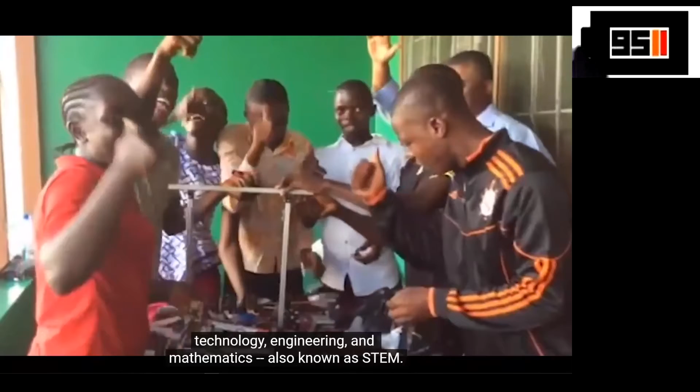Our mission is to inspire leadership and innovation in youth from all nations by empowering them through education in science, technology, engineering, and mathematics, also known as STEM. With First Global, any student can bring their imagination to the table and receive the tools to make their vision a reality. We accomplish this by hosting the First Global Challenge, an annual Olympic-style international robotics competition.

One team of youth from each country builds and programs a robot to compete in a game themed around an issue of global importance. But more than scoring points, these athletes score invaluable life skills by cooperating on alliances, surpassing cultural, geographic, and linguistic barriers to achieve their goals.

We're bringing the same passion and energy of sports to the field, but using it to inspire generations of high school-age students all over the globe to think creatively, problem-solve collaboratively, and lead collectively. In doing so, we're creating the changemakers who will work together to solve the challenges of an ever-evolving world in need of solutions. And is there a greater future than one created by ingenious young minds united for a better tomorrow?

Hello and good evening. My name is Tim Dodds, and it is my undeniable honor to welcome you to DAR Constitution Hall for the inaugural and 2017 First Global Challenge. 157 teams in 6 continents in total, but all coming together and convening as one. In the course of the next 3 days, these students, scientists, leaders, learners, dreamers, and believers abound will come together and cooperate on this grandest of international stages in robotics.

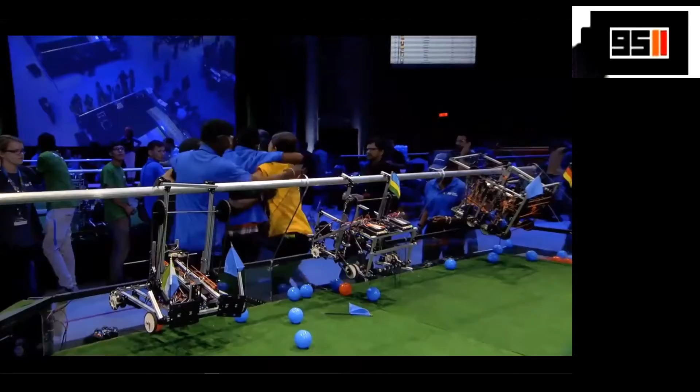It's very interesting to see how these teams interact with one another. These three were able to galvanize and gear up for the long road ahead in terms of competition.

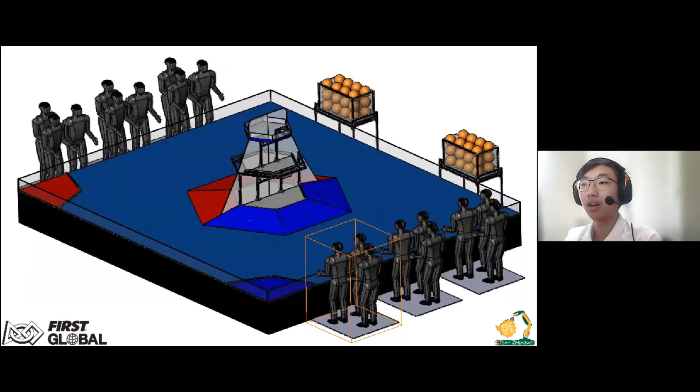This is an image of the game. First Global Challenge usually has a robot game, like an FTC game with specific rules tied to the theme. In 2019, they had to move these balls around to simulate cleaning pollution off the ocean. In 2020, the theme was connecting communities, the very first virtual global challenge. And 2021, this year, the theme was Discover and Recover. That's what we're presenting today, the efforts of Team USA and Team Zimbabwe in this challenge.

As I mentioned, the 2021 challenge has 3 parts. The first is a solution challenge, where you pick one of 4 categories: education, environment, health, and economy. Across 3 phases, you focus on one area and build a solution to a problem in your local area. Both us and Team Zimbabwe chose the environment, and we'll talk more about our solutions and how we ended up working together later. That's a brief intro, and we'll go into more detail.

Byron. So, Trish joined back. Trish, do you want to give a few words? Byron just walked through Malvern's slides. Do you have anything to add, Trish? Do you want to talk about these pictures? Where were these pictures from? Is this from during the First Global Challenge, or before?

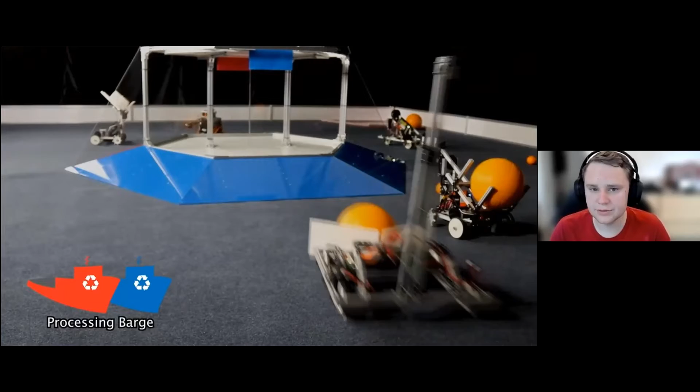So as talked about in the last presentation, our game was Ocean Opportunities, where the game was based around cleaning up debris from the ocean. There are a few different ways to score, mostly placing the large or small balls into one of the few places on the processing barge, which were worth 2, 3, and then 6 points. One of the main strategies at the competition was actually to collect as many balls as possible, since there was no limit, and then dump them all at the end of the game. You could also at end-game park on the processing barge for 5 or 10 points, and then a hang was worth 20 points.

So our bid to Dubai was a once-in-a-lifetime opportunity. And because of that, our team received a lot of local, regional, state, and even national attention for being named Team USA. Additionally, the increased visibility that came with attending First Global Challenge was very meaningful for our team because we were able to promote FIRST and STEM education in our communities, and we had a big platform to do that.

And before traveling to Dubai, we were invited to Washington, D.C. by the Arkansas delegation in D.C. And we learned that one of our senators actually wrote about our Inspire Award win and our First Global bid and submitted it to the National Congressional Record. So we had the pleasure of meeting the previous Team USA, which was FTC Team 9794, Wizards.exe.

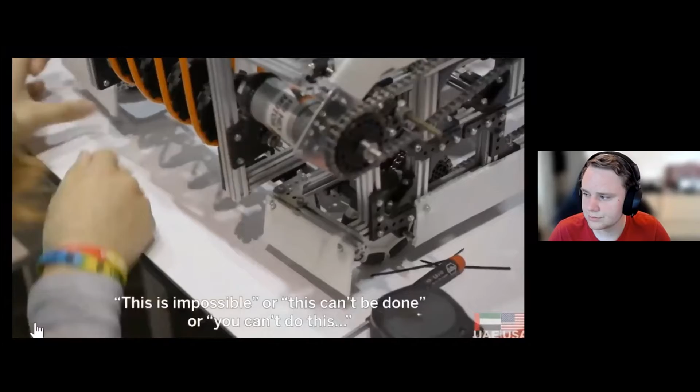Let me start by sending a message to all these young people here. First, I'd say anytime they hear someone telling them this is impossible or this can't be done or you can't do this, don't listen. Look to the future and don't let anything stand in your way. I think there are a lot of problems in the world today that can be solved by engineers.

I think the best thing that FIRST did to us is it brought people from all different cultures to interact with us. So this afternoon in our final match of the day, we're partnered with the UAE and Lithuania. There are 193 teams here today in Dubai. These kids have to learn how to cooperate and solve problems together. Inventing is about imagination, courage, the ability to fail and plow through it. Even though we have different accents and we're from different regions of the world, our passion for STEM is what brought us together.

So I want to thank everyone for listening to our short presentation about our experience. Of course, I want to congratulate the TechnicBots for being chosen as Team USA this year. I'm sure you'll do great at representing the USA. And we hope you have an amazing, great learning experience despite it being virtual. But now we welcome any questions that anyone may have. If there are no questions, thank you, and that's all we have. Thank you, everyone.

Okay, thank you, Bryant and Abby. Next, we're going to have Grace from TechnicBots. So for the FIRST Global Challenge 2021, 8565 TechnicBots was nominated by the FTC headquarters as Team USA to compete in the challenges. And we're honored to work on the challenges in the last 12 weeks, having Michael and Mila from Boys and Girls Club join us in the journey. In the next few presentations, we're going to share the work from our various challenges in more detail.

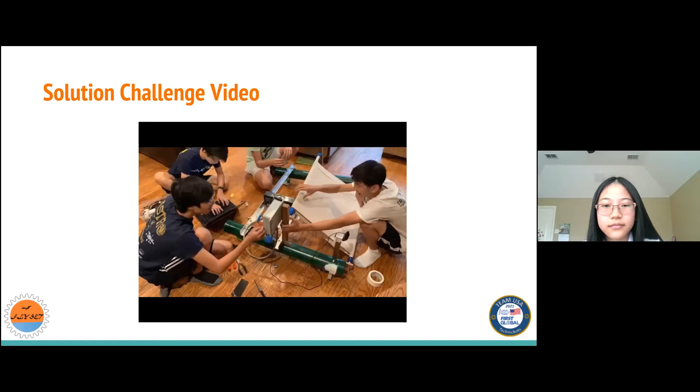We formed an alliance with Team Zimbabwe and picked the issue of plastic pollution, as it is a challenge faced by people from both continents. We designed the plastic pirate and land buggy as solutions to this problem and designed the framework to make this into a global mission. For our solutions challenge, building the robot required meticulous planning on our part. For example, we did physics calculations to find the buoyant force that our chassis could provide, and also made extensive use of CAD tools in designing the entire robot.

We used a multi-stage machine learning model to classify and locate all the plastic waste floating on the surface of the water. Throughout the Solutions Challenge, our team learned that creating an open source solution requires lots of details, so it is easy for others to replicate.

Okay. We formed an alliance with Team Zimbabwe.

Okay, now let's move on to the next section of FIRST Global, the Robotics Challenge. The Robotics Challenge is an opportunity for students to reinforce their robot design, building, and programming skills. FIRST Global teams used the components provided in a REV Robotics kit of parts and created solutions to 4 individual build tasks. Instead of assembling a single robot, teams completed those 4 build tasks, which represented major components often found on FIRST Global robots. And these here are the 4 different build tasks that we had to do. Here is another short video that kind of shows our journey through the Robotics Challenge.

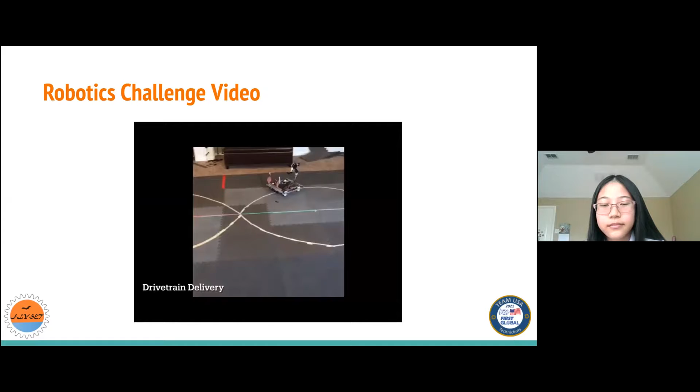In the Robotics Challenge, we learned to be resourceful and get creative since we were building with a very limited kit of parts, which was a completely new experience for us. Wait, sorry, accents. In the Robotics Challenge, we learned to be resourceful and get creative since we were building with a very limited kit of parts, which was a completely new experience for us.

So more details of the robotics challenge will be presented later on in this track. Now for the third and final section of the FIRST Global Challenge, the CubeSat prototype challenge. So for this challenge, teams defined a mission of importance to their communities and then used a provided Arduino-based kit to create their own CubeSat prototypes to provide a tangible solution to that local need. Teams designed, built, programmed, and tested their CubeSat prototypes and then deployed them into the lower layers of Earth's atmosphere.

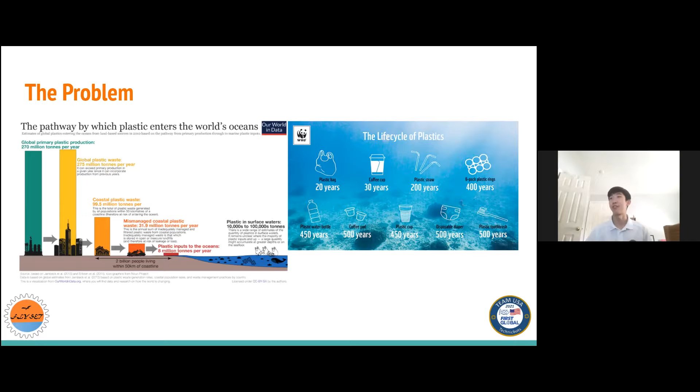So our solution is to build a robot to help collect some of that plastic. We call it the plastic pirate. What it essentially does is go around and collect pollution or debris off of the surface of the water. So anything that's floating on the surface of the water it will be able to collect. And it will be storing that locally in a storage bin and filtering out all the water so it doesn't accumulate too much weight. And then once the storage bin is filled, it would go back to land and then we can empty it out.

So as for the actual build of this robot, as with all robots, we started out with designing the chassis. And we decided to go fully custom with no kit of parts this time, because the robot had to be quite big in order to collect a reasonable amount of debris off the water. So we built the chassis out of PVC tubes and put 2 end caps on both sides to help trap the air inside. This is what provides most of the buoyant force on our robot, because it's 2 massive tubes with very little weight.

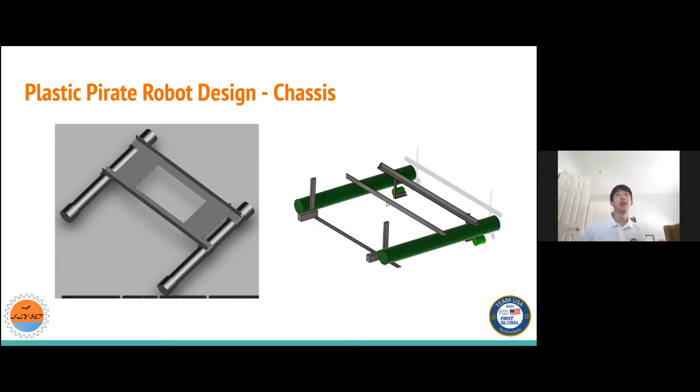To propel the robot, we chose to use 2 brushless DC motors with propellers on them. You'll see that in the CAD model, right here. These are the motors that are actually driving the entire chassis, and it actually worked pretty great. We don't have a rudder on this thing. We're relying on controlling the speed of the 2 motors to steer. And here you can see the chassis working. This is when we tested in a backyard pool to make sure everything was working before we started putting more things on it.

And now we move on to designing the intake. So we had several different ideas for designing the intake. For the debris found on the water, there's 2 main categories that we thought of: round objects and non-round objects. For non-round objects, we could easily just slide them up a conveyor belt like this. So this entire sheet of fabric would start turning like this, and that would just draw whatever debris was on the water into the storage bin. So that's how that works.

But then if we were to encounter a plastic bottle or something of that sort, they would simply roll off of the conveyor belt. So we added these 4 stages of vinyl tubes up here at the top to stop that from happening. These will be able to push the round objects straight up the ramp. And that's how we designed our intake.

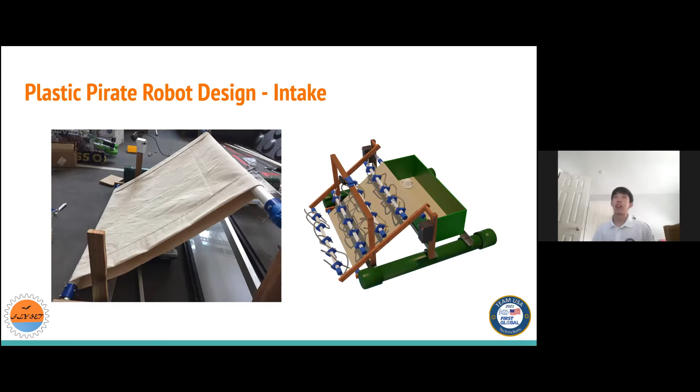So here's a model of the robot in 3D. This is like the nice already rendered view in Blender. But if we rotate around a little bit, you'll see that these were right here. These are these little covers on the PVC pipes I was talking about earlier, so we don't damage the actual pipe like this pipe while we're drilling, or we're trying to drill holes to mount things.

And then if you want to look at the propellers we use, they're actually quite small propellers relative to the size of the robot. The size of the robot was about 1 meter by 1 meter. So it's quite a large robot. And we just have these tiny propellers on it, which actually works pretty great because the brushless motors spin really fast. We chose to use brushless motors instead of brushed DC motors because brushed motors will not survive in water.

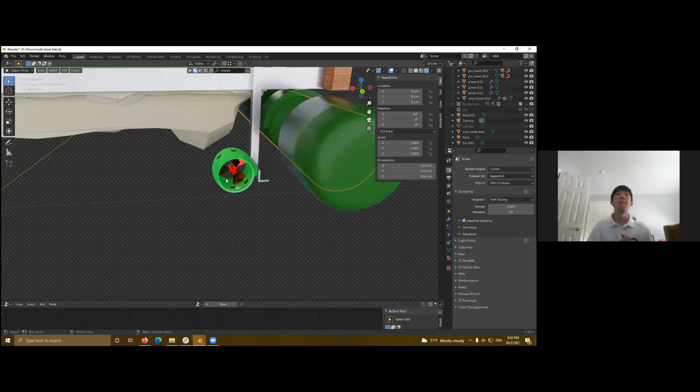They have brushes on them that have to be exposed inside the motor. So that would mean that if water were to get inside of the motor, the entire thing would just stop working. Whereas with brushless motors, there are no exposed contacts. It's just a simple ring of magnets that are rotating around a center coil. So that's why we chose to use brushless motors instead of brushed, even though that made the electronics quite a bit harder.

And the solar panel is up here for good measure. It's up there to help extend the life of the robot. We can just run the robot off of these two batteries right here, but the issue is that they aren't going to last very long. So the solar panel helps extend the life of the batteries or the runtime of this overall robot.

And as for the electronics box, we just shoved it right here under the ramp because that was the most convenient place for it. It's not in the way. We can't really mount anything else there. So that's where we put our electronics box.

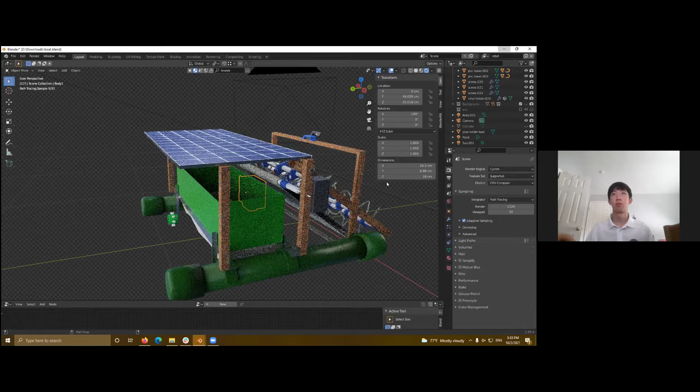And finally, let's talk about how we designed the circuitry on it. So our control circuit was mostly centered around a Raspberry Pi. And we controlled the electronic speed controllers, the ESCs, which were needed to power the brushless motors, through the Raspberry Pi's GPIO pins. We had a GPS going to it to help the actual robot know where it was in the water. And we also have a camera on it to help assist in object detection or object recognition.

The Raspberry Pi is running some sort of object recognition on it, which is why we couldn't just go with a regular microcontroller. That wouldn't be powerful enough. And then the solar panels over here are hooked through a maximum power point tracking charge controller to help maximize the amount of power we're getting from it. And we're also storing some of the data to an SD card. The SD card also hosts the operating system we're running. And now Anthony will talk to you about the software he wrote for the robot.

All right, let me share my screen. I don't think I shared the right thing. Okay, do you see it? Do you see it now?

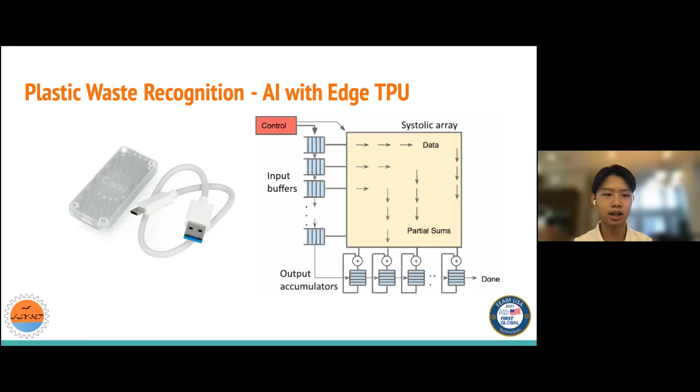So the robot spins around constantly, and then once it's detected some plastic waste, it uses a P controller to turn precisely to the water bottle, and this P controller is good for our application because it minimizes overshoot. And so once you align yourself with the plastic bottle, once it's in the middle of your view, you just go straight forward with your intake on, and you keep going forward until you don't see it anymore.

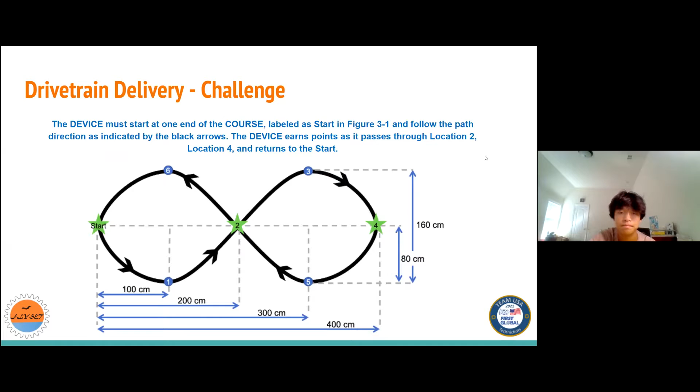So here's our design process. We began by looking through the bill of materials to check which parts we could use for a robot. This helped us set the parameters that we could build in. Like I mentioned before, the bill of materials is limited, unlike the typical FTC challenges, where we have the freedom to build whatever we want.

So after studying the bill of materials, we selected the wheels we wanted and the motors to build our chassis. Then we designed this entire drivetrain in CAD to confirm all the parts we needed would work perfectly. And then finally, we built the chassis.

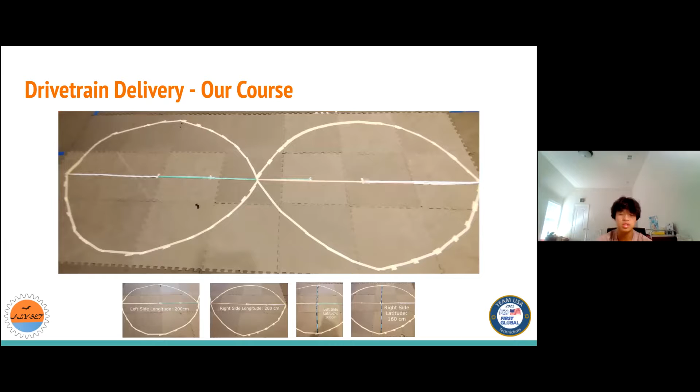So here's the drivetrain course. This is the minimum requirement size, and it's already fairly big, as you can see. It's like 200 centimeters in longitude for each oval, and then 160 centimeters in latitude. So it's quite big for a living room.

The sprockets on each of the wheel shafts are 20 to 15. On the motors, there's a 3-to-1 and 5-to-1 gear cartridge on each of them, making it a 15-to-1 gear ratio. So in the end, the effective gear ratio is 20-to-1 for each wheel. And the dimensions are 470 millimeters by 420 millimeters by 130 millimeters.

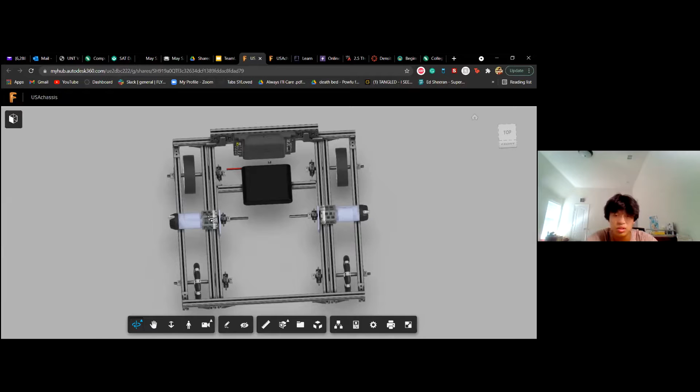And here's the CAD model that I made in Fusion. So here, as you can see, we have 4 wheels, 2 traction wheels and 2 omni wheels. Like I mentioned before, here we have the 2 UltraPlanetary motors in the middle and the sprockets. There's no chain in CAD, but on the actual robot, there's going to be a chain connecting all 3 sprockets together.

Okay, let me share my screen.

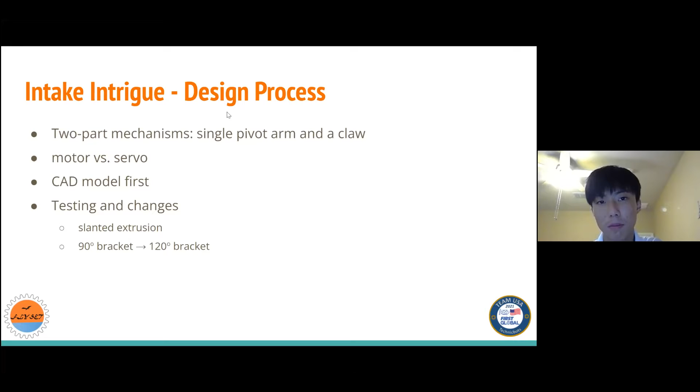Yeah, so this goes into more detail of the final design decision. We decided to go for the claw. It was powered by a REV Smart Servo to control the opening and closing functions. The servo gear was attached to a smart servo, so it could transfer power between the claws via gears. And the claw itself was mounted on a slanted extrusion.

For the arm, to raise the claw, it was powered by a REV Core Hex motor. It was attached to the slanted extrusion, and it was mounted onto a separate vertical extrusion, which was then mounted on the chassis. So this entire intake design was mounted onto a chassis.

So here is the CAD. So this is the CAD model of the intake. So it's pretty CADed, so we can see all the parts that we would need and how everything would space out. Okay.

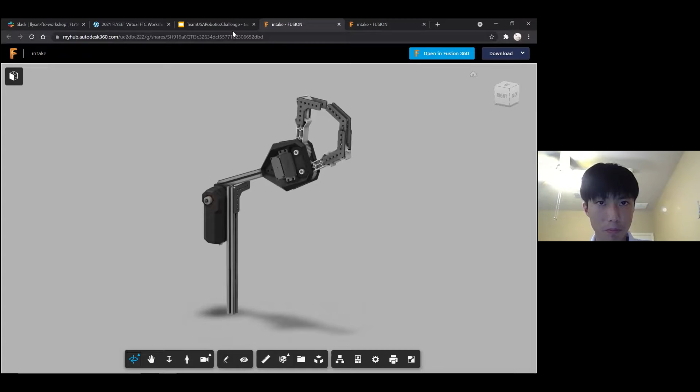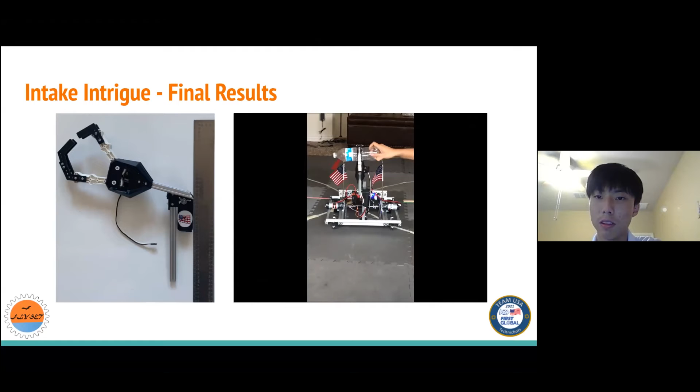And for the final results, so here you can see the arm going down to grab the water bottle, and then once it has a firm grip, so you measure it first to see. Right now, I'm measuring to see that it clears 5 centimeters. And then we're testing to see if the intake has a firm grip. All of this was coded by Hrithik.

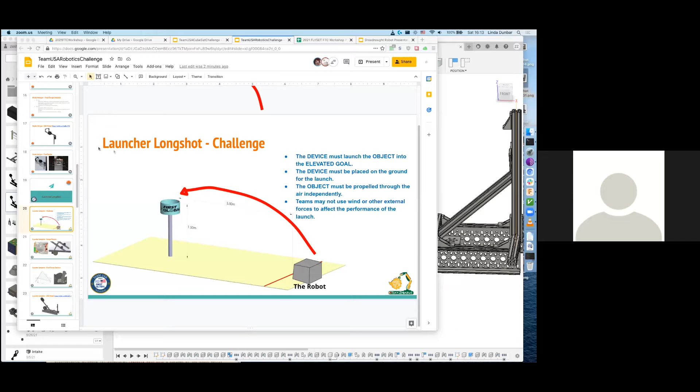Okay. I guess I should share for this one. Okay. Okay, so I guess I could start already.

So the Launcher Longshot thing is basically a robot must launch a tennis ball sized object. Then the object independently flies through the air and lands into this goal. Wait. Okay. And this diagram is kind of roughly to scale, and the robot has to fit inside this gray box, which is about 1/2 meter on all sides. And it, yeah, over here. And we had about 2 weeks to make this.

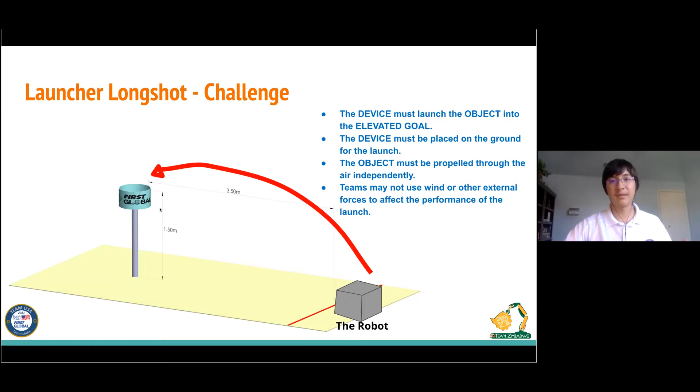So what we did was a catapult. So we started with a bunch of research online. We looked at some guide on how to do catapults, and our mechanism, which is based on this, is called the choo-choo mechanism. Basically, a screw poking out of this gear hits this first linkage, causing the 2 linkages to bend back on each other, like that. And then as soon as it passes over the center, the springs can freely pull this up, and the things unfold in the opposite direction. And that causes it to go up super fast. And then at the end of the catapult arm, it's just a normal cradle for any ball, just like this one.

Okay, so our final design looks like this thing on the right. And here's the drawing in CAD that we based all the dimensions off of. You can see there's this line for the catapult when it's fully pulled back, and this line for the catapult when it's fully extended. And we wanted to maximize the distance between them so we can maximize how long it accelerates. So we minimize the amount of ground clearance, and the second linkage has to be longer than the first linkage. So we make it only 1 millimeter longer here.

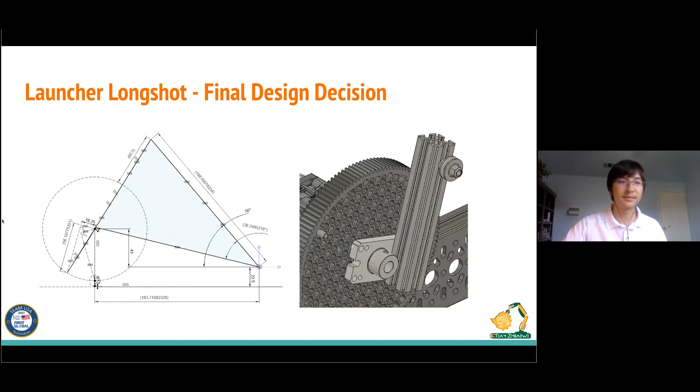I guess for linkages, we can't just use a custom bar. So we actually did a bunch of iterations and a lot of work on these linkages. There's a bearing block here connected to an extrusion for the first linkage, and the second linkage is just these 2 V bearings connected by string.

So this is the final CAD model. I guess you can see here the cradle we ended up going with, just a giant sprocket with a bunch of screws sticking out. And those are the cradling things. And then the spring itself is a bunch of surgical tubing that goes in between these 2 hinges. And they're attached by zip ties, which we like a lot because then we can just tighten the zip tie and it gets more spring force. Or if you want it less, then you just cut the zip tie and make a new one.

Okay, so after we tested physically, what we didn't expect is that the spring force in the catapult was actually way bigger than what we thought it would be. So you can see in this example, it actually ripped the hex screws out of the extrusion, or this is the channel. So to fix that, we just drilled through the entire thing, and we put a screw through the entire thing, and that strengthened it a lot.

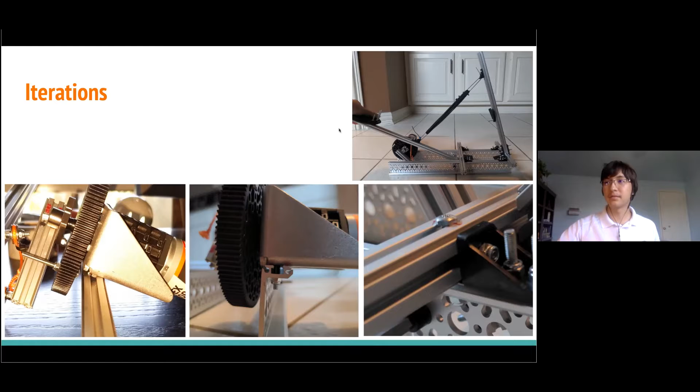And then probably one of the biggest structural improvements is this rib right here. As you can see in the previous slide, whenever you pulled it back, this whole thing would bend a ton. In order to stop that from happening, we added this rib here. We wanted it to be a 45-degree bracket, but over here on the bottom mount, there is no REV part that can mount that, right? So what we did instead is we just put this plastic bracket at the bottom to kind of create a corner, and then this 45-degree extrusion will just sit in the corner, and it'll transfer all the force by pushing on it.

And then up here, we were supposed to put a 45-degree side bracket on it, but the extrusion we cut ended up being too short. So what we did instead, we just screwed this bracket onto the extrusion and slid it down until it clamped this in place. So it works pretty well, although if you were to take this and shake it, this extrusion would fall out and you'd have to put it back in.

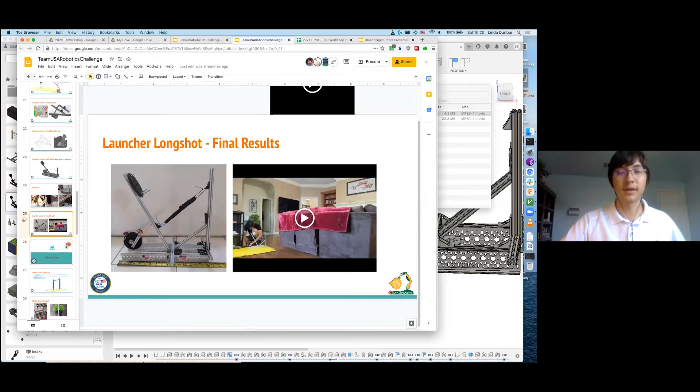I guess I have the video on my, here. Okay. Yeah. I can also show you the CAD model for this. Okay.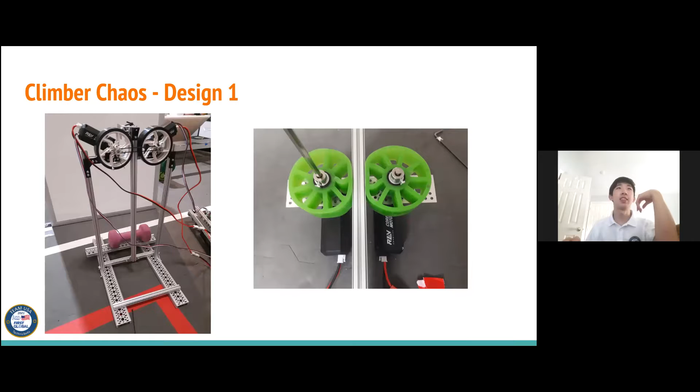And here is the final product. Of course, when we first started designing this, we had to draw it out in CAD just to design it faster. And then we also verified the physics behind this climber to make sure that the motors could actually provide enough force to lift the device. We found that the two motors will be providing 142 newtons of force, which is plenty to lift the 7 kilograms, which only requires 68.6 newtons of force. That's more than double what we need, giving what I thought was a good margin of error.

But the problem is that when we tried to extend, here, I'll just show this in CAD. Here's the first iteration. When we tried to extend this slide right here, it would extend at a slight angle like that. And then that would start rubbing against the carrier slide, because there were not a lot of points of support for this. So when we tried to move it up and down, there was actually a huge amount of friction between the wheels and this slide. So our first iteration failed because of, well, nothing being perfect in the real world.

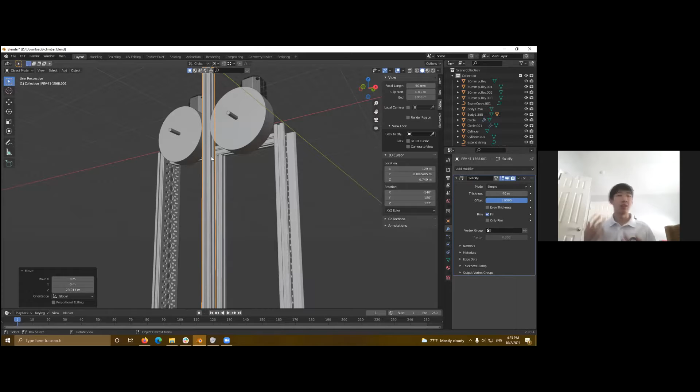For our second iteration, we moved to linear slides again. We tried to avoid linear slides for our first iteration because linear slides get messy and they're kind of complicated to wire and spool, and it's a slight headache. So I tried to avoid that as much as possible at first. In this one, we essentially just took two orbital motors, threw a pulley onto them, and then had a 2-stage slide on it. And we also put this one-way switch almost at the top so it could easily clamp onto the PVC pipe that we were using as our support.

Now, this one actually was able to lift itself up pretty nicely. But the main problem with this one is we didn't read the instructions clearly, and our device had to be at least 30 centimeters off the floor. If you do the math, this slide right here is about 48 centimeters. We're almost maxing out at our 50 centimeter height.

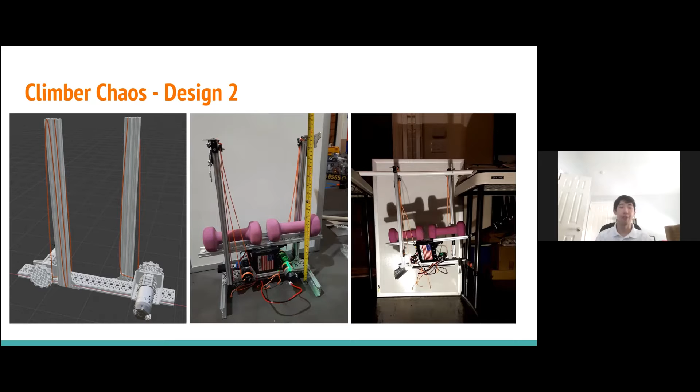And then these could extend another maybe 30 or 40 centimeters. So we were getting around 80 to 90 centimeters of extension. Our bar was placed at 75 centimeters just to make it easy for the one-way switch to clamp onto it. So if you do the math, 75 minus 50, that's 25, meaning that this device could only physically lift itself off the ground 25 centimeters, which wasn't enough to fulfill the requirements. So we had to go back and redo this design again.

So in our third iteration, we basically just added another stage of linear slides and changed the base a little bit to accommodate for the increase in height. This one's also maxing at 50 centimeters right here. And the linear slides are routed in cascade. We did that mainly because it was easier to route it in cascade than in series: less pulleys, less strings coming loose. That also means for the return string, the pulley radius had to be doubled.

Earlier we also did a physics calculation to verify everything would work, and for this one, the motors could apply 5 times as much force as was needed to lift the 7 kilograms. So that was actually enough this time. The real world isn't completely mean to me. So it was enough to lift the device quite nicely. And that's how we finished out this challenge, by doing a 3-stage cascade linear lift. And here's just a video of it working.

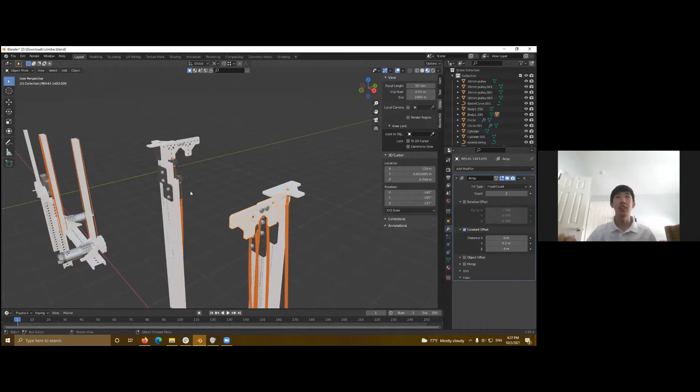So here's the final design. I'll put it in material preview so you can see the strings a little bit better. Up here, it's essentially just two of these T brackets mounted together with surgical tube, which has similar properties to a spring, that was included in the REV kit of parts. And this is what was lifting our final design of the climber. Thanks to Hrithik for programming all of this. He did all the programming for all of these robotics projects.

Okay, I also have a slide, so let me share that. I'm going to talk about how I programmed the three: drivetrain delivery, intake intrigue, and the one which Champers was talking about just now. First, the drivetrain delivery program. I had two approaches. The teleop approach basically just used a basic tank drive controlled by two joysticks. And the autonomous approach used the IMU for turning and encoders for driving forward.

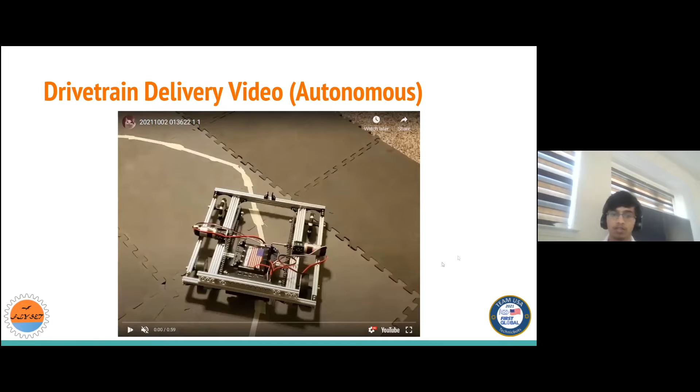Okay, so, oh, oops. Okay, so now the intake program. For this one, we had an arm and a claw, which we had to control. So I decided for the arm, I would control it yet again by using encoders. And I would control the claw by using the servo.setPosition method to control the claw. So the code is pretty simple.

So whenever gamepad A is pressed, it sets the position to 140, which is actually like pointing downwards. And then whenever gamepad1.b is pressed, it brings it all the way back up. And then it does the same thing for the claw, just that I think gamepad1.y opens it, and then gamepad1.x closes it.

So then finally, the Climber Chaos program. So we had a left and a right motor for this. And I decided that we would have two states to have the motors in. There would be a changing robot position state, which simply just changes the motor's speed based on the direction. So basically the state would let it move up and down.

And then the last one is the keep robot's position state. As you saw near the end of the video, which Champers showed, the robot was simply hanging. So basically this state helps keep the robot in that position without it falling down because of gravity.

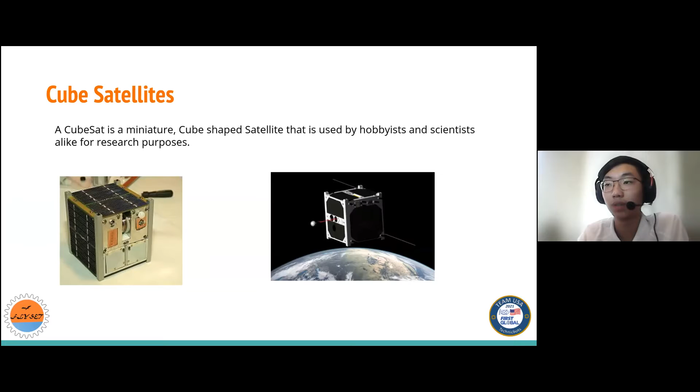So let's briefly go over what CubeSat even is. So a CubeSat is a miniature cube-shaped satellite. That's what the name stands for. It is used by both hobbyists and actual researchers. Usually they're launched into orbit and used much the same way that an actual size satellite is, to record data from outer space and from the surface as well, because it's orbiting around.

So in First Global Challenge, we're using CubeSat prototypes. They're basically the same as space-ready CubeSats, but instead of actually being launched into space, which is prohibitively expensive, we are launching them into the lower levels of Earth's atmosphere, aka just the air, using methods such as high altitude balloons and hobbyist rockets. And I think both of us have decided to use balloons this time around. We'll talk about them more in a bit.

Let's go over the First Global challenge video. I'm sorry, I need to share the sound as well. Okay. So this is the official First Global challenge video introducing CubeSats.

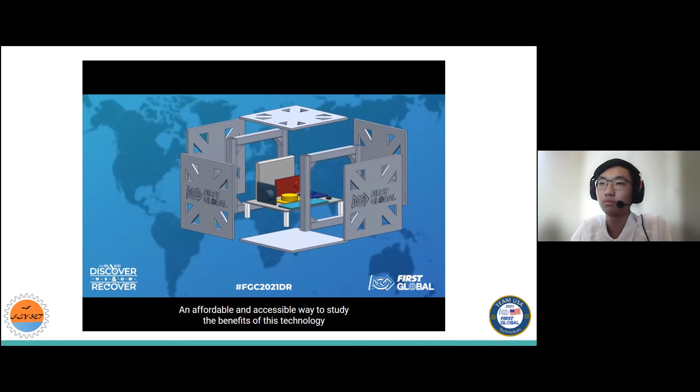What is a CubeSat? CubeSats are a class of nanosatellite with a standardized size of 10 cubic centimeters. They are launched into space using rocket-powered launch vehicles, or can be deployed from the International Space Station. Applications include Earth observation, weather monitoring, communications, and more. A CubeSat can go from concept development to deployment in less than 8 months. By comparison, it takes over 5 years to design and launch a large satellite. CubeSats generally orbit the Earth at an altitude between 400 and 700 kilometers and travel at a speed of around 8 kilometers per second. That means they orbit the Earth every 90 minutes. An affordable and accessible way to study the benefits of this technology is through CubeSat prototypes. A CubeSat prototype is modeled after space-ready CubeSats and features the same size specifications. Instead of space, they are launched into the lower layers of Earth's atmosphere, the troposphere and stratosphere, which extend up to 50 kilometers. CubeSat prototypes do not require the same strict qualifications as space-ready CubeSats for attributes such as vibration, radiation, temperature, and shock. They instead provide a perfect opportunity for you to craft your own space adventure.

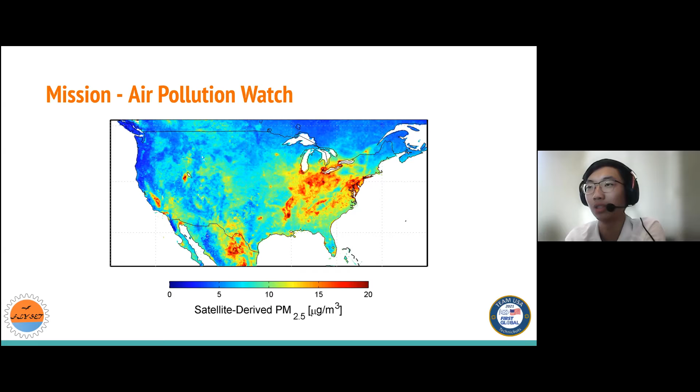So we wanted to understand our pollution levels, our trend over time, and trends across different regions, and across different altitudes especially. And then we wanted to visualize this data, generate graphs like we talked about, and generate actual recommendations to local environmental agencies: hey, there's a lot more particles over in this region and at this altitude, so that might be a focus to clean up on.

So what actually makes up a prototype? Well, every CubeSat prototype that's made out of the kit of parts that FGC provided is based off an Arduino board with an SD card that records data. And each of them contains multiple sensors. One of the most important is obviously the PM 2.5 particle sensor, which actually detects the air quality. And also you need the GPS module to know what position your readings are in.

These are basically the most important ones, but we also have a light sensor, air pressure, and UV index sensor, and a camera to record our flight and supplement all these actual sensors. So let's talk a bit about the prototyping process, and I think Otto and John can talk about what we did here.

Right. So at the beginning of the process, we divided the CubeSat challenge into 4 different tasks, and we assigned each of these tasks to one of the team members. So I worked on programming the Arduino board and sensors to write their values to a CSV file on an SD card. John designed the exterior to fit the sizing requirements and house the board, battery, and sensors.

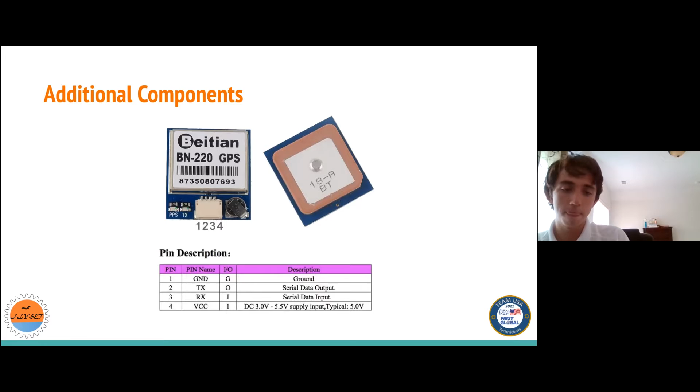Next slide. We also used a Beitian BN220 GPS chip. And this gave us our altitude and latitude and longitude and acceleration. Next.

To prototype, we started our first iterations on the breadboard. I simply wrote a program to write sensor values from the environmental shield to an SD card. And once I got that simple program working, I could use that format and extend it to write all kinds of different sensors in a CSV file. So there's not only the ENV shield, but the smoke sensor, the real-time clock, the GPS, all of them are communicating to the MKR board, which is then storing their values on a CSV file in the SD card on the shield.

Both the laser sensor and the real-time clock off to the right connect to power, to ground, and to pins 21 and 20, which are 12 SCL and 11 SDA. And both of these sensors can communicate through the same pins because they're communicating through, I believe, the I2C, which means that their data can be indexed coming from the same pin. And there's a specific protocol which allows us to collect data at alternating times from two different sensors attached to the same connections. Additionally, we have the BN220 GPS, which also connects to power and ground and has data pins going to the serial pins.

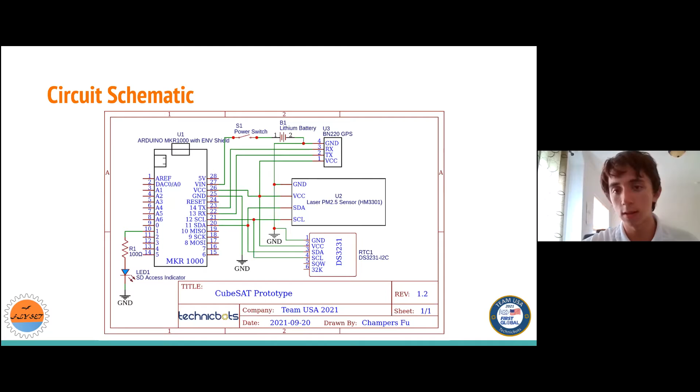We have an LED connected to pin 1 to indicate whether the SD card is accessible. And also there's a power switch and a lithium-ion battery to regulate the power that is going to the whole system. All right, next slide.

All right, for our exterior design, we wanted to have a good airflow to our PM 2.5 sensor. We wanted to have a shelf for extra mounting space, right? So there's like 2 platforms where electronic components can be mounted. We wanted to have easy to access inner components. We wanted to maximize interior space and have a hole for a camera, which eventually we did not include, but it was still helpful to have that opening.

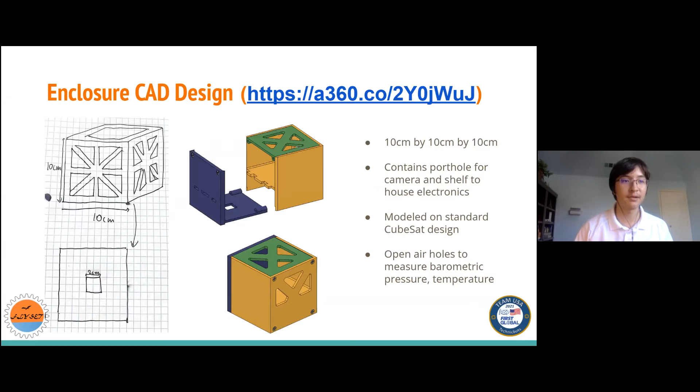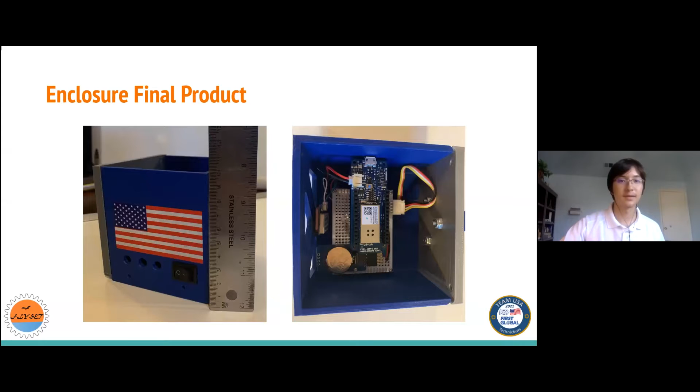And so 3D printed parts are weaker in one direction. However, we orient them in a way so that all those directions kind of go different ways, and it actually can be quite strong. Yeah, this is the final image of what the enclosure looks like.

Okay, so we're briefly going to talk about Team Zimbabwe's prototyping work. They did a lot of the same things as us, where we both used the kit of parts provided to us. And however, we can see that they're actually using slightly different code, of course. They have their own implementation, and they managed to create these sensors and basically a dashboard to track the values that they're having.

I'd like to add that it was probably a lot harder for them to get the resources they needed to actually code all this, because their internet connection and their access to internet is a lot worse than what we are used to here in the US. But they also managed to get a working prototype and a fully functioning CubeSat for data collection. So after we have our working CubeSat prototype, we're ready to launch it.

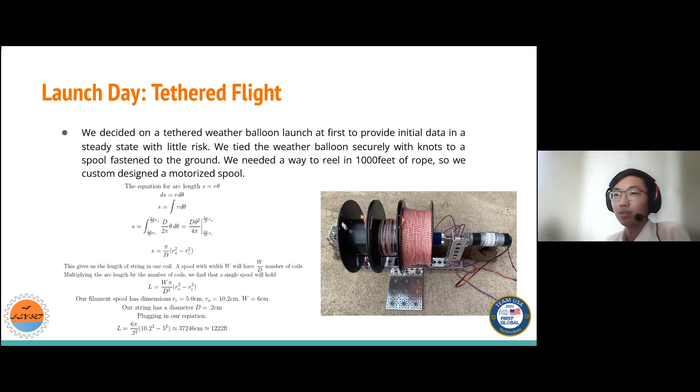This is a video of our launch. Ladies and gentlemen, we have liftoff.

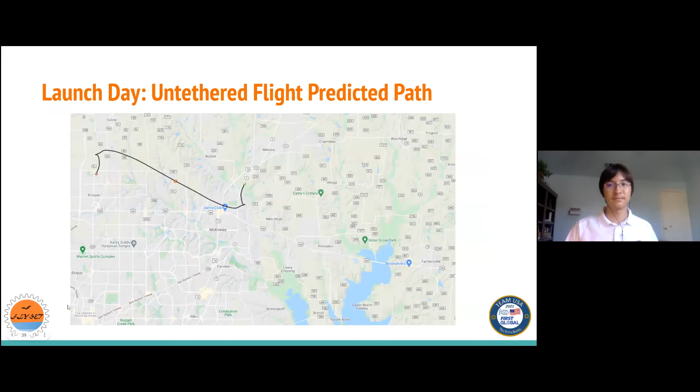Yeah, so we also used this calculator. We have a link to it somewhere in the info docs, but it's the HabHub calculator that gets the wind speeds in the surrounding area and tries to give you the predicted path to where it's gonna land. I think we can talk about this more after we show you the launch video, but it was helpful at first, and then we realized that this calculation was way off. So let's first show you the video of our untethered launch.

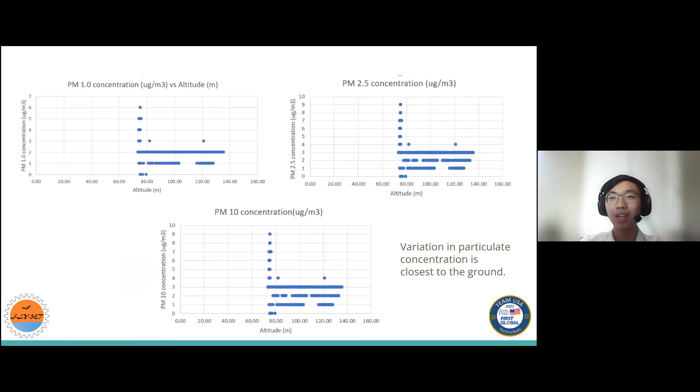So initially we were planning to have a GPS connected to the Arduino, and that would help us get the final location where it landed. But I guess it got too high and we stopped receiving GPS data, and then we were planning to get it again once it popped and landed on the ground, but it just never showed up for us. So we had no way to recover this GPS data, and we didn't end up being able to retrieve our balloon.

So yeah, even though both our launches had a couple of setbacks, we were able to collect the data we needed. So we've got all this analytics. Who's the one? Otto or John? Can you talk a little bit about these graphs?

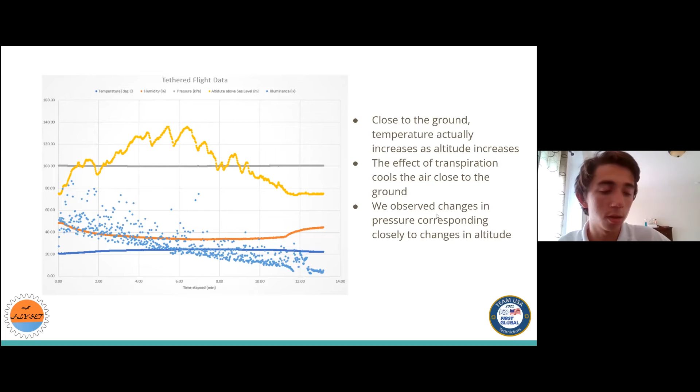So what we can gather from this experiment, from this data, is that transpiration has an important role in cooling the immediate vicinity or the immediate ground level conditions, even if the temperature is higher a little bit further up in the atmosphere, which could be a powerful tool in combating global warming and the quality of life for people like us living at the ground level.

This next graph shows the data from the smoke sensor or the particulate matter sensor. You see 3 different sizes of particles. Their concentrations are plotted on the y-axis, and the x-axis represents altitude. So you see at the lowest levels of altitude, there's a very great variation in particulate matter concentration. This could be due to a lot of things. This could be due to dust on the ground, plant matter floating through the air, allergens like pollen, and some level of pollution at the very ground level.

But as we got higher and higher, we noticed, generally speaking, the particulate matter concentration was comparatively very low. So we concluded that, at least from our data, there was not a significant amount of diffusion of particulate matter into the upper layers of the atmosphere. But of course, this was just one trial, and it would require more trials and more extensive study to get a more conclusive result.

Next. So we learned many lessons from this. The GPS module, the BN220, was a bit difficult to program because the conventional software serial library did not work with the MKR that they provided us. So instead, we had to use the conventional serial port instead of overcomplicating things by creating our own special serial object, which in the end didn't work.

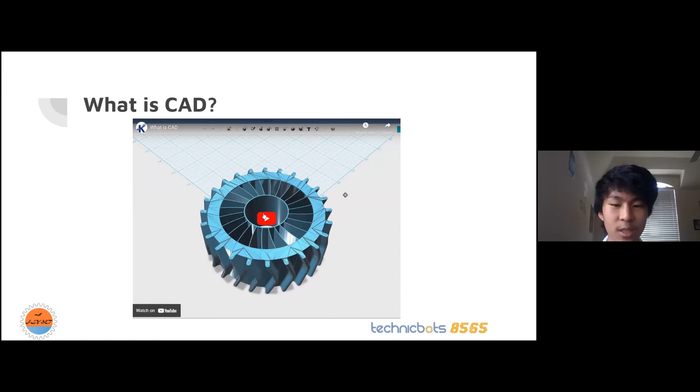So in this lesson, I'm just going to be introducing what CAD is. I'm going to talk a little bit about different CAD softwares, and I'm going to be going through a run through of Onshape, which I sent an email about last night. So if you received it, you should have installed it or created an account and should have been able to open it. And then finally, we're gonna end off with some practice. So just to start off with what CAD is, I'm going to play this video, which I think introduces CAD really well.

Hello, it's Keith from Kinvert, and in this video we're going to be talking about what CAD stands for. CAD is Computer Aided Design, and that's basically what you're looking at here. This is CAD software, Computer Aided Design software. So what students will start off with is making relatively simple shapes. So for example, we could make a creeper shape by adding some feet down here, adding a body, and then we can smart scale this. So this is the main body here of the creeper. Oops. And then we grab that one. And then we bring it like this. Add another cube over here.

Okay, actually, because I think this might take a while, I'm just gonna condense it down into a few sentences. So CAD stands for Computer Aided Design, and it's kind of self-explanatory from its name. CAD is just using computers to help, let's say, create, modify, or optimize any 3D objects or designs that you might want to create. For example, this person in the video is creating a creeper from Minecraft, and that's an example of CAD.

And CAD is just a really good way of increasing productivity because in the past, people would always just have to draw designs on paper, and they would have to draw 3 different angles to show what every plane of their design looked like. But with CAD, you can create a 3D model with much less time and much more efficiently than we ever could before.

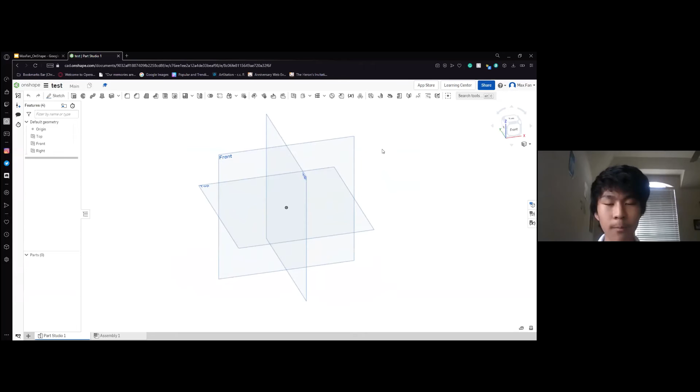To turn around, if you have a mouse, then the default would be Alt and then your scroll wheel. So click on your scroll wheel, and then you can drag your mouse around after that. To move your origin from side to side, you would go Control and then click on your scroll wheel, and then you can move your mouse and it'll move side to

side, up and down. To zoom in or out, you can either click Shift and then hold the middle mouse button and just move your mouse up and down to zoom in or out. Or if you have the middle mouse button, then you can also just scroll it, and that'll just zoom in or zoom out.

Now I'm going to talk about how to create these 3D objects that are at the basis of every 3D model. So in Onshape, you would have to go to Sketch at the top left, and you can see that there is a blue box surrounding Sketch plane. That means that it's waiting for you to select one of these 3 planes, either the front plane, the top plane, or the right plane. And I'm just going to select top plane.

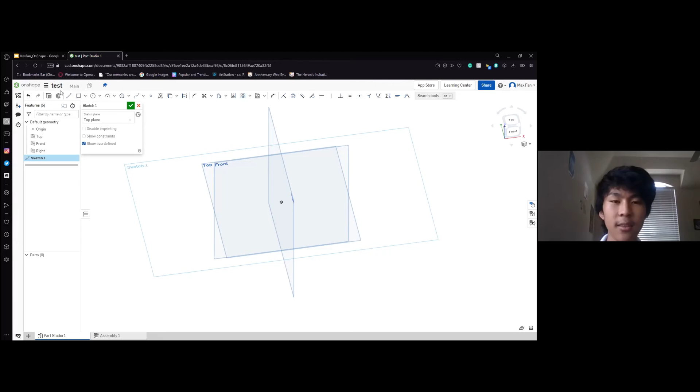From there, you can see that at the very top your tools all changed. And all these tools are made for creating or editing the objects that you create. So the only shapes that Onshape gives you are rectangle and circle. It also gives you some other ones like arcs and different polygons. But for the most part, you would just use the line tool to make your irregular shapes.

So to just start off, I'll give you an example of how to make your shape 3D. So you can choose either line, rectangle, or circle. I'll just choose rectangle, and you would click anywhere on the plane that you chose. And you can see when I drag my mouse out that it also drags the shape of the rectangle out.

This is just one way to change the dimensions. You can also see on the length and width of the rectangle the actual dimensions of the rectangle, and you can change those later. But for now, when I want to set my rectangle down, I can just left click again, and you can see that it creates a 2D rectangle.

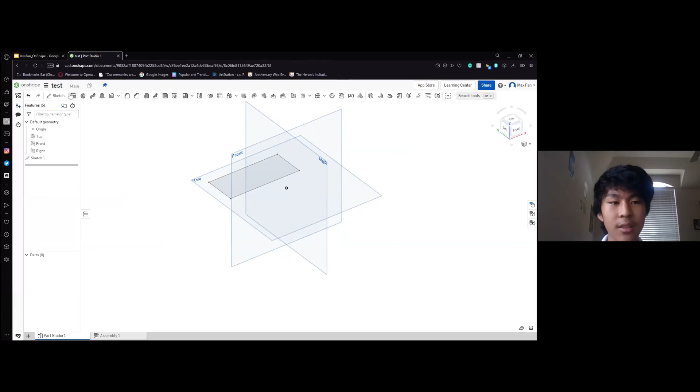But since we're trying to make 3D models here, we want to extrude it out or just make it 3D. And to do that, we can just click the check mark here or Enter, and that'll bring us back to the normal page. From there, at the very top left, right next to Sketch, there is an Extrude button. You can click that or Shift E, which is the hotkey, as you can see when I hover over it, and then click on your 2D shape that you just made.

From there, you can see that there's a blue outline of a rectangular prism, and that's just what we want. So that's pretty much how to extrude it. If you want to adjust the height of this, then you can always just click on the arrow and bring it up or down depending on what height you want.

You can also see that over here where it says depth, that's another way to change it. So say I wanted 2 inches instead. If I click 2 and Enter, then you can see that it changes the model as well. And once I think that it's good, then I can just click the check mark.

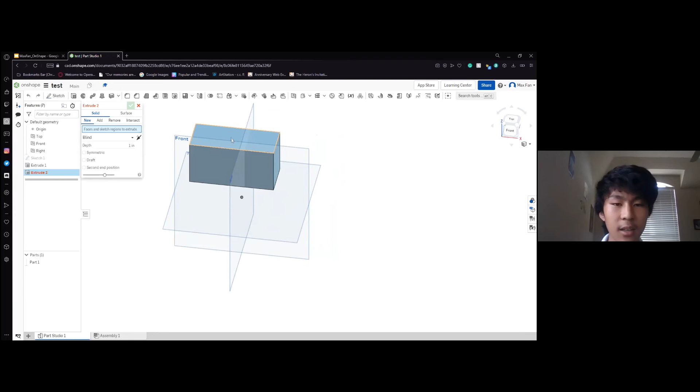So another thing to know is, say I want to cut into this, or I want to extrude it out again. That would be really easy. You can just go back to Extrude here, click that, click on any of the faces here. And you can see that there is another translucent rectangular prism. And from there, I can move it up to add it, or if I wanted to move it down, then I could also move it down.

And you can see that when I do that, there's an error message that says Boolean resulted in no geometric change. That's because I am still technically adding to it. So even if I bring it down, there's nothing to change because I'm just adding more to what's already there.

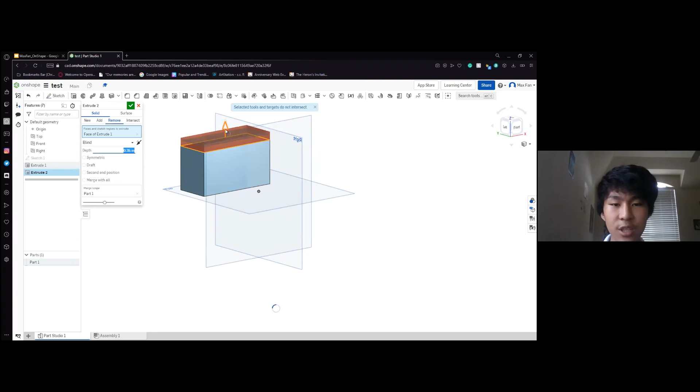So instead, if I wanted to remove it, I could go over here to remove, and you can see that now it says selected tools and targets do not intersect. And that's because what this red rectangular prism is covering, there's no objects there, so there's nothing for it to remove. So then I could just drag the arrow down and it would remove what was already created there.

And same as before, I can also just change the height next to depth. So say 0.5 inches, and I could just click check.

So as you can see in the toolbar, there's a bunch of different tools that you can use. Most of them don't really matter. They're usually just for finer details, but some of them do make editing models slightly easier. For example, there is the hole button, and as the name suggests, if you click on it and choose a face, then you can make a hole through it.

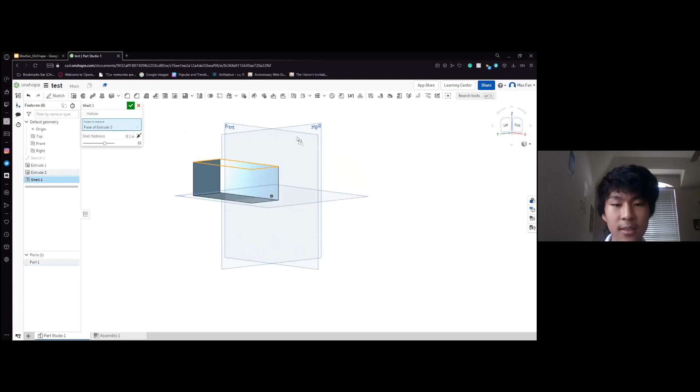Or for example, shell. This is similar to hole, but instead of creating a hole, you can see that when I click on a face, it removes basically everything except for the sides. And I can change the shell thickness through this text here. I can just change it to say 0.5 inches, for example. And you can see just how much that changed. And if I'm okay with that, I can just click the check mark.

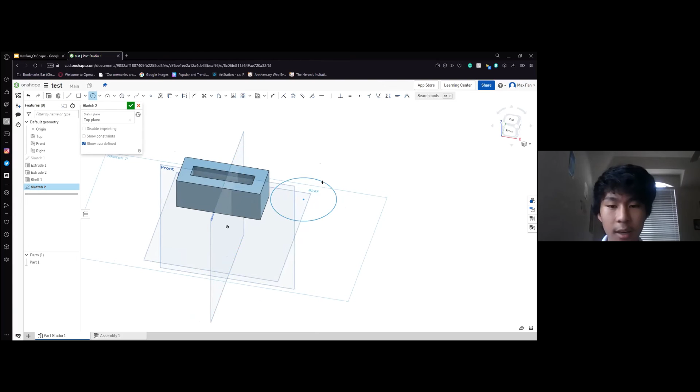And then I'll just create another sketch as another example for this. So I would choose another face or plane. I would choose a shape and circle. I would choose a starting point, choose an endpoint, click check, and then I would extrude that out to make it 3D.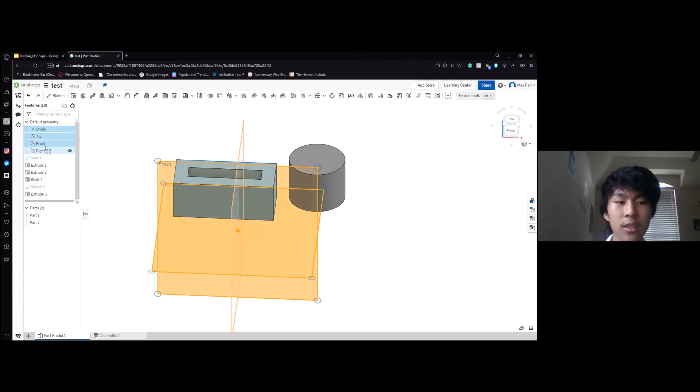Okay, now I'm going to talk about this outline here on the left. It's pretty standard in any 3D modeling software. This is always going to be there. It always gives you the origin, as you can see here, which is just the center of your design. It also gives you the 3 planes. And it also gives you the history of every action that you've done in this design. So you can see that it shows the extrudes I've made, the shells, and also the sketches.

And right below that, you can see there are part 1 and part 2. When I click on them, it also highlights the shapes that I've created in the design. Part 1 is just the rectangular prism that I've made, and part 2 is the cylinder that I've made. These are just the names that Onshape automatically assigns to 3D or custom parts that you make.

And to change that, you can just right click and rename. This will make finding your 3D objects much easier and allow you to edit them much faster later on. So I could just name it rectangular prism, and this one just cylinder.

Now, just as I said before, you can see all the edits that you've made. Say I wanted to change the height of the cylinder; I could just go to extrude and reduce the height there. But another way I can do that is by going to the history, double clicking on the extrude and changing the depth of the height.

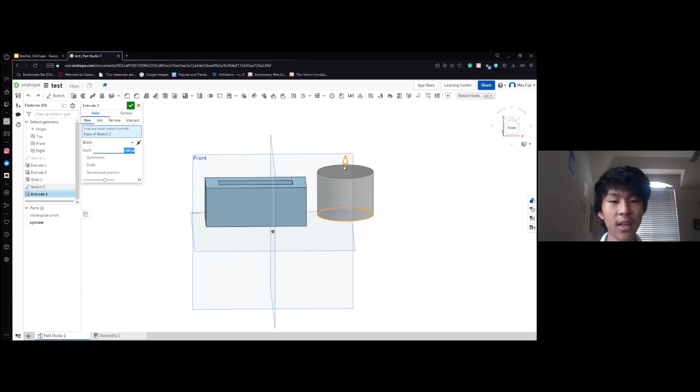So you can see that it's currently at 1.66 inches, but I can also just change that to say 1 inch. And you can see that it changes that. And once I click check, it also automatically applies that onto the design.

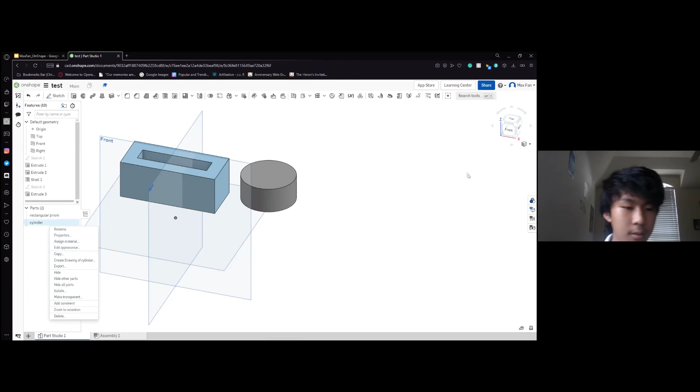So now I'm going to teach you how to move objects, because in Onshape, it's slightly different than other 3D modeling softwares. And this is one of the things where I said that it was just a little clunky. So if I want to move it, then I can select the part here.

And then from there, you can see that there is a little transform button in the middle here. It kind of looks like 2 blocks and 2 arrows showing that it's moving from one place to another. And you can just click that.

So now you can see that transform, and you can see that there's a drop-down box here. Right now it says translate by line. But what's best in this case, I would say, is translate by distance or translate by XYZ. So for example, translate by distance. It kind of means what it says. It changes the distance by whatever you want it to.

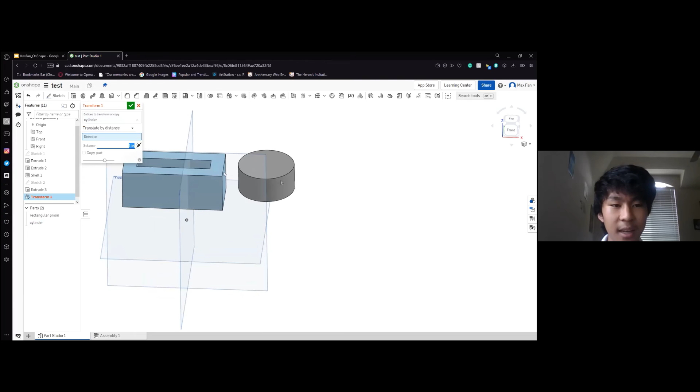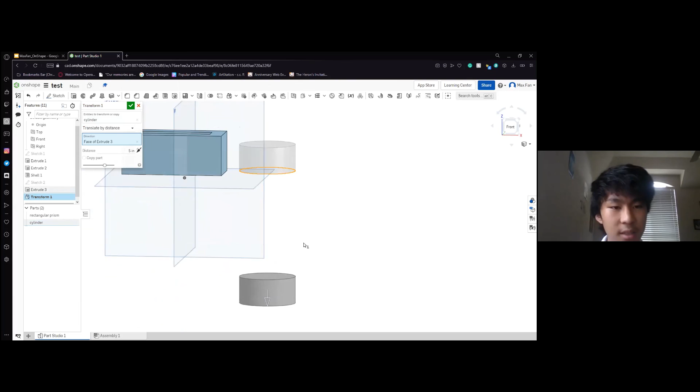So say I chose -2, then, oh, I guess that has to be positive. Okay, so say I wanted to change it 5 inches, then it would move 5 inches. But I would also have to set the direction. And by doing that, I would have to select, as it says here, 2 vertices, an edge, a plane, or a cylindrical face. So for example, if I just wanted to move it down, I could select the face of the cylinder. And you can see that it moved 5 inches in the Z direction.

But if I wanted to make it go up, then I could select the top face, and you can see that it goes up as well. Another way to translate is translate by XYZ. And this way I think is the most efficient, because you can just use arrows, or you can manually make it into any way you want it to.

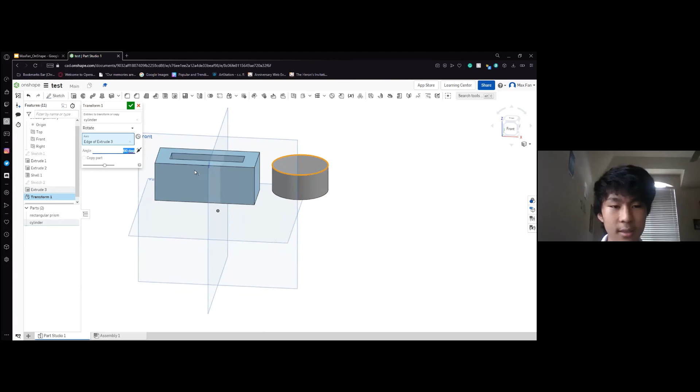The last type of translation that's pretty important is the rotate. And that's sort of just what it means, to rotate it. And just like in the translate by distance, you have to select points where it rotates. So if I select the top edge here, I could change the angle to say 60. And you can see that it does nothing. And that's because in Onshape, you also have to create a reference point for where it rotates.

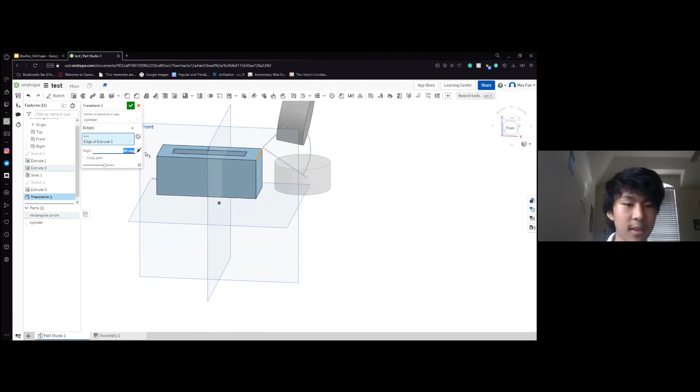So not only do I have to select the edge of the cylinder, I also have to select the edge of another part. So if I selected the edge of this rectangular prism, I can make the cylinder move. And I can also just use this arrow to change how much it rotates. And just like with everything, I can also change it in this text box here. So say 80 degrees, and then I can click check. So that's pretty much all the basics of 3D modeling in Onshape.

Another little fun thing if you want to do is you can change the colors of your objects. To do that, you just click on one of your objects, right click, and then over here where it says edit appearance, it gives you a bunch of different colors. So if I wanted a red or a blue, I can just choose that and click check. So that's just a really brief rundown of how to use Onshape.

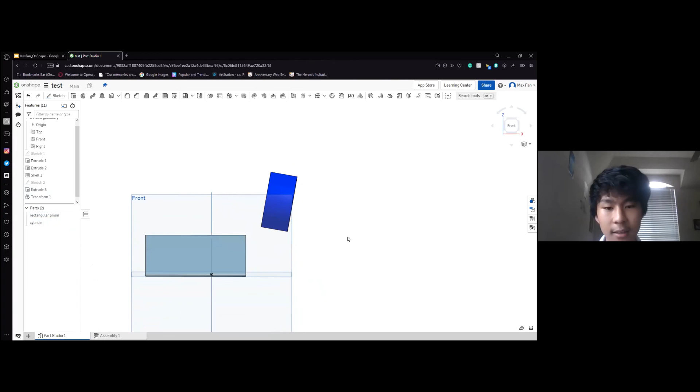So now if there are no questions, which I'm pretty sure there will be, I want everyone to try and create the first logo. So this is what it looks like, and this is just what I made in like 5 minutes. So it doesn't really have to be that precise. It's just a little something to get you more familiar and doing some hands-on stuff with Onshape. So just practice that. And if you have any questions about it, you can just put it in the chat.

So I see that Arush asked if it was better to be in millimeters or inches. It's really up to you. I use inches mainly just because that's what I started with, but occasionally I do use millimeters because when I 3D print stuff for a team, the software that I use to 3D print automatically reduces everything to millimeters. So I could either scale it up in the software, or I could just edit the model in millimeters and I wouldn't have to do anything.

Specifically for FTC, it's really just a personal preference. Take this for example. When I put together all the pieces of our robot, our builders usually create all the subsystems, and then I put them all together. And if someone was working on a custom part in millimeters, and the parts that other people were making were in inches, then that would create some problems. You could just scale it. There is a way to scale it in Onshape and in the software that our team uses. But it's really just up to the person and whatever they prefer.